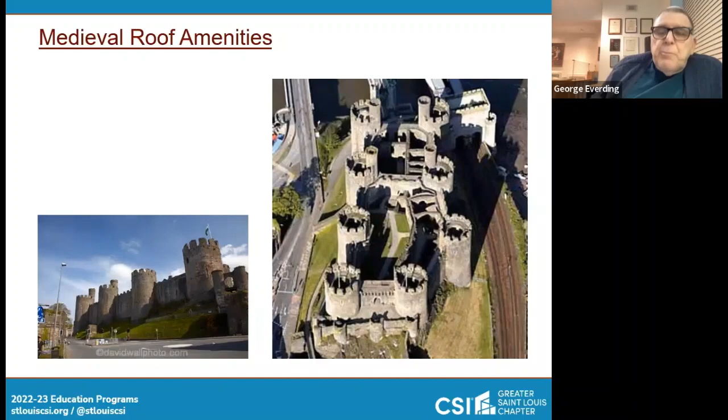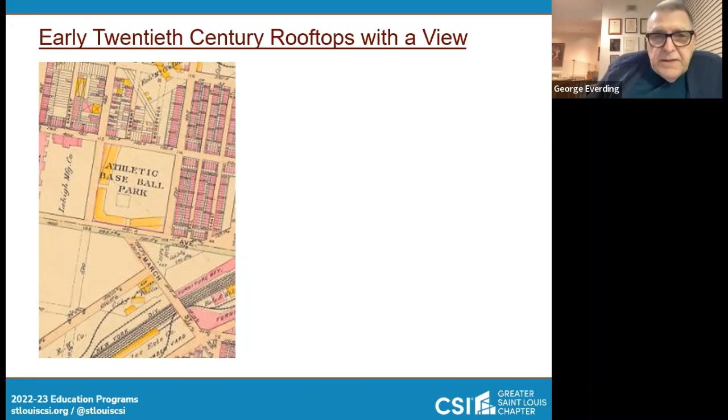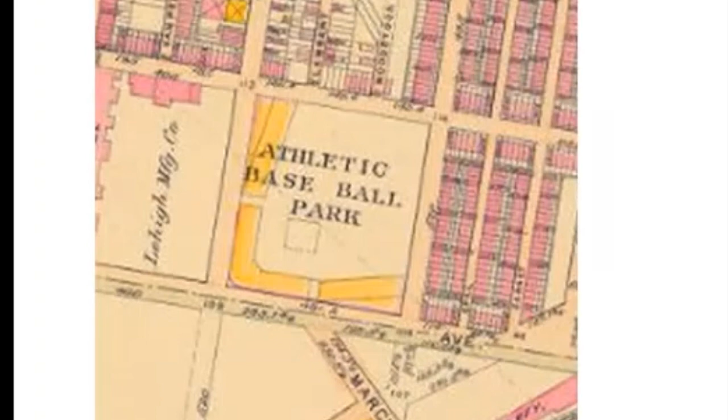And we're going to look at another instance of a view in the 20th century. This is a map of the Philadelphia A's ballpark in about 1910. In the earliest part of the 20th century, they were a powerhouse, and they built a new ballpark. You can see, kind of to the right-hand side of the ballpark, there is a row of row houses, and that fence out in right field is only a 12-foot fence.

Things can change. And this is possibly the world's largest green roof—this is Millennium Park up in Chicago. They claim it to be one of the largest extensive green roofs in the world.

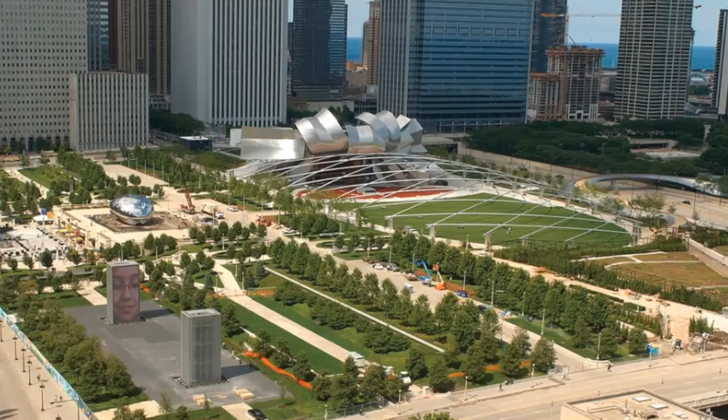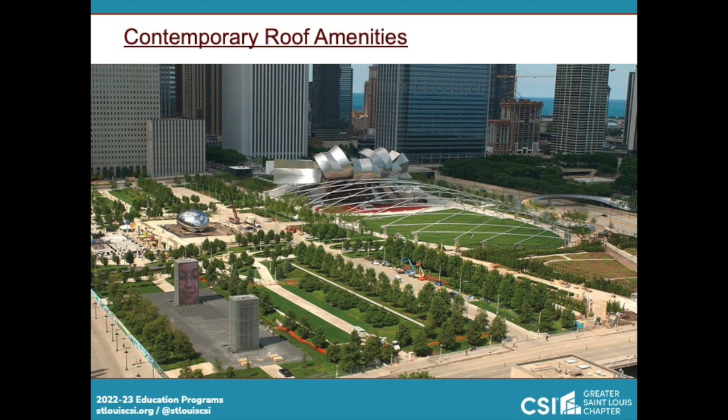If you're planning your green roof, this might be the model you want to put on top of your 2-family flat. Pritzker Pavilion seats 4,000 and has 7,000 for lawn seating. There are various sculptures, fountains, play areas, and a skating rink, 11 separate venues total, and you can see it's quite extensively landscaped.

But I think the thing this has in common with the roofs we're going to be talking about today, other than maybe scale, is that it's accessible, it's useful, and it's a delightful place to spend some time. So I'll turn it back to Steve or Joe.

So for myself personally, I've been in this industry for probably about 20 years out of college, and I used to do healthcare design. Actually, I used to work with George years ago over at Canton Design. But probably for the last 8 or 9 years, I've really switched over and focused more on adaptive reuse. With that being said, my co-presenter here, Sarah, I'll let you take over.

Thanks, Joe. Hi, my name is Sarah Johnson Clark. I've been in the field for about 4 years now. Joe and Alan decided to take me under their wing from day one, and I've really taken an interest in adaptive reuse. So I've done a good handful of store renovations with Joe and Alan, and plan to do more. We look forward to presenting about roof amenities today.

So you want a roof deck, green roof, or roof amenity. That's really what we're talking about, especially with regards to existing buildings and our local standard of care.

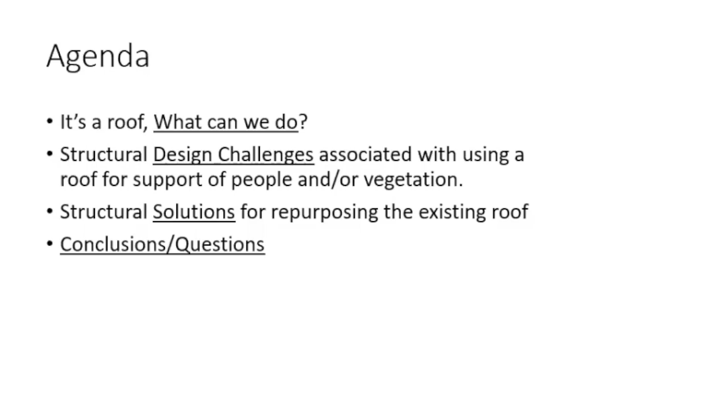What can we do with an existing roof? So first we're going to talk about exactly that, what can we do in terms of occupancy, but then also in terms of structural solutions for the roof amenity itself. So starting with the types of occupancy, the example you see here in these photos is the 900

North Tucker building in North downtown St. Louis. This is considered a roof amenity that has 2 parts to it. As you can see, we have an enclosure, and we also have a lot of outdoor space. This is actually a place of business and or event space for the building occupant, not necessarily a public event space, which for us structurally is a very crucial number that we need to understand going forward.

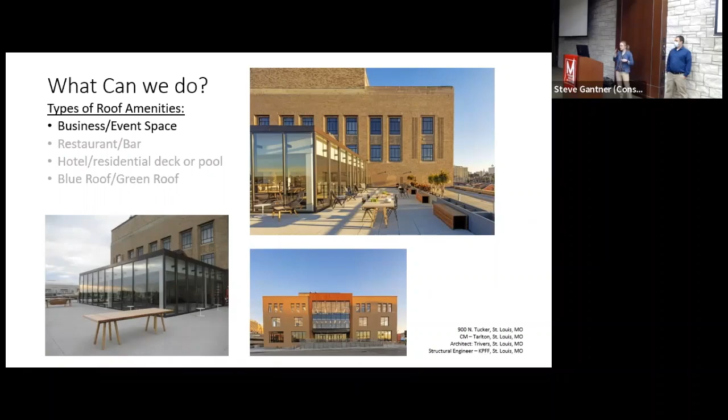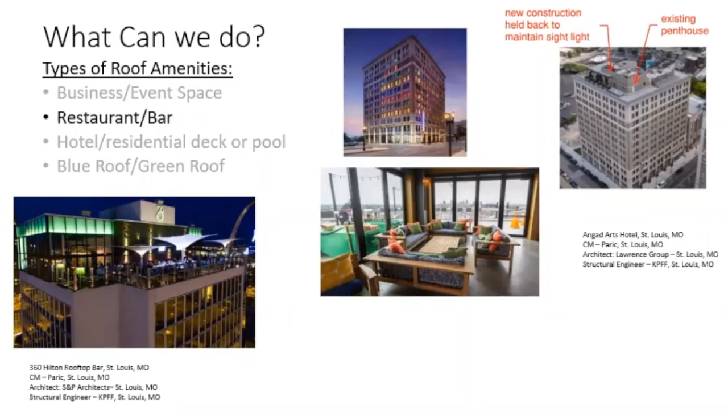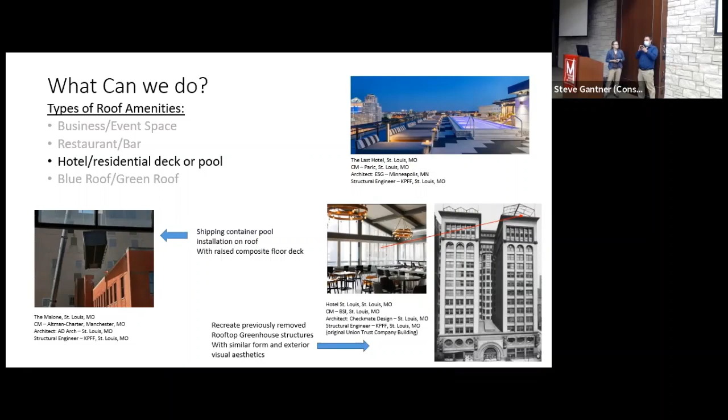Right, and for those unaware, SHPO is the State Historic Preservation Office. You go in for national tax credits and even state level tax credits. You go through SHPO, your Part 1 and Part 2 application first, and then it eventually works its way over to the National Park Service. Traditionally, Missouri SHPO is a little bit more cautious than the National Park Service. So if it passes SHPO locally, you usually pass through the National Park Service.

So in the lower left corner, this one is over in the downtown West area. It's an existing telephone exchange building in which the building itself had plenty of extra capacity. So we actually reanalyzed the building, did a little bit of supplemental support, and actually brought it into shape for the pool.

These pools, prepackaged, come around $40,000, and it's significantly less in cost versus having a custom pool added to a roof. So it's a good option as well.

In the upper right corner, this is the last hotel project. We ended up designing a steel pool system to be brought up in two parts by lift and then welded in place. We had an entire new frame structure for it, with occupancy and existing building.

In the lower right corner, you'll notice something really interesting. This is Hotel St. Louis, not to be confused with the last hotel. It was originally built in the late 1890s and actually had greenhouses on top of the roof, as you see in the lower right corner.

Since that time, those greenhouses were removed, probably before the 1920s, and everyone forgot about them. When it came around to repurposing this building, the discovery that greenhouses had once been there allowed for a new replica greenhouse system, even though it's an enclosed structure used for different purposes, to be built on top of the existing roof. At that point, SHPO would allow for this alteration with guidelines accounted for, because it had been there at the time of original construction.

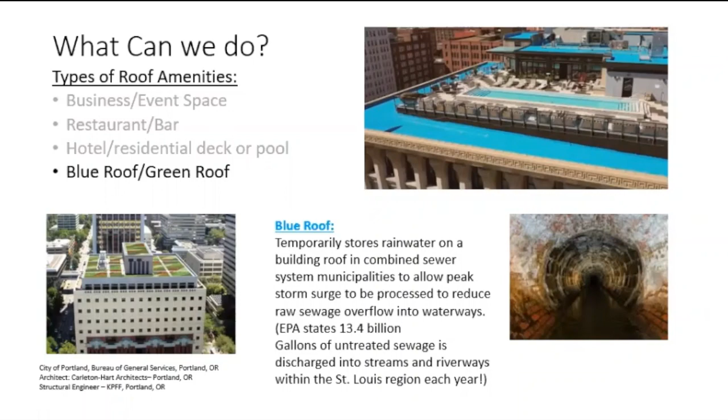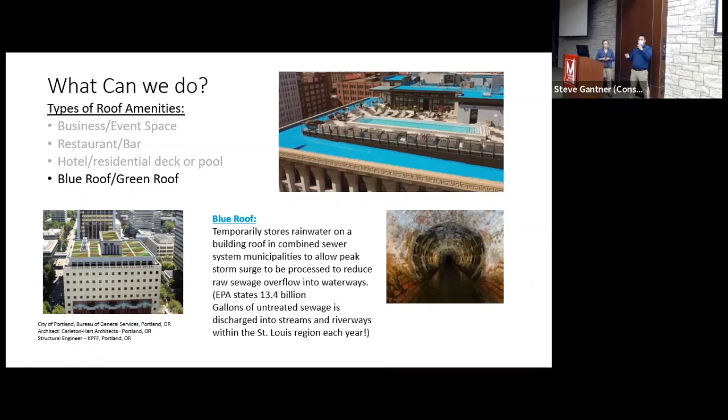An interesting fact: the EPA states that 13.4 billion gallons of untreated sewage is discharged into the St. Louis riverways each year because of the combined sewer system. That's why there's such a focus on this being an option for rooftop use in urban environments.

So now we know some things we can do with the roofs. We'll talk about what we can do with amenity structural systems. Sometimes we run into cases where, let's say, you have a heavy timber building, or something where the structure itself was lightly designed in the first place - there's not a lot of extra capacity.

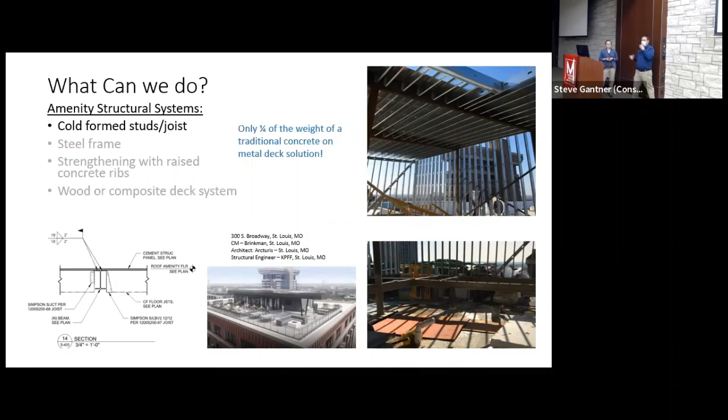This is an example of 300 South Broadway, which is now repurposed or re-identified as Ballpark House, I think that's what it's branded right now. It's right across from the stadium. What we ended up doing is putting a rooftop amenity deck on top of the building, and what was really important was that we weren't overloading the original structural capacity below.

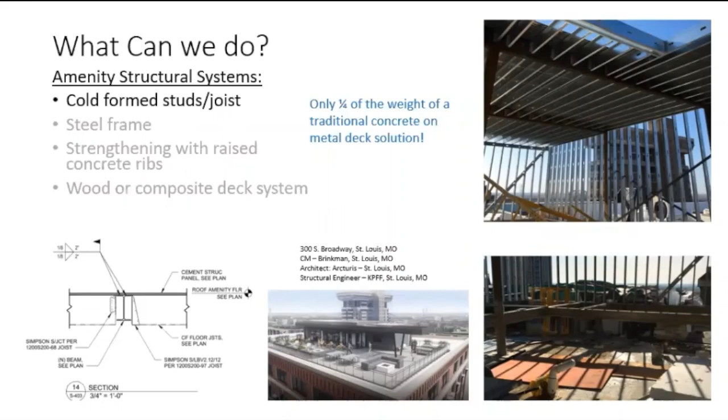So to try to get the weight down for the rooftop amenity, we ended up going with a cold-formed construction at the top, which reduced the weight to only a quarter of what it would have been with a traditional steel and concrete system. This allowed for strengthening the columns along the building and other aspects, really reducing costs and saving the owner quite a bit of money in the long run.

Another structural system that is often used is simply steel framing, whether using wide flange steel or, in this particular case, HSS tubes for our beams and columns. This particular system is beneficial, especially if you want glazing.

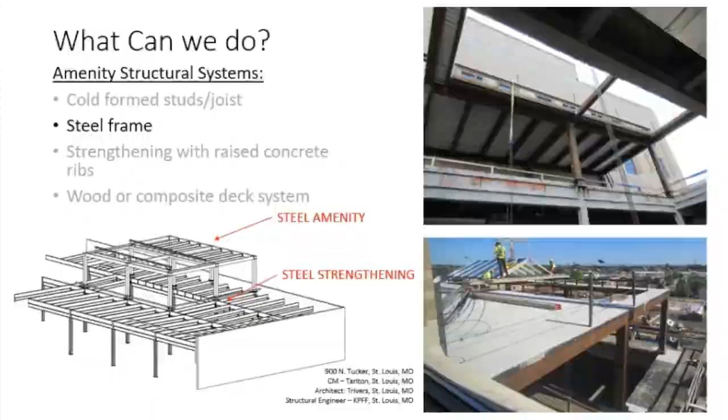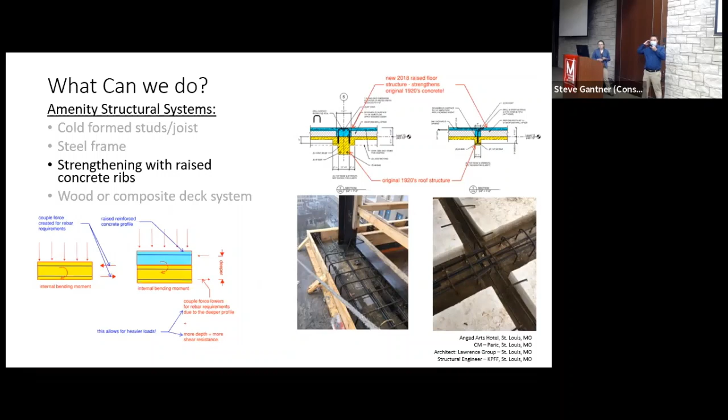So if we're going to go ahead and raise the floor anyways, why not use that raised floor in combination with the existing concrete structure below to strengthen it all? In this particular example, we use geofoam infill aligned between original concrete beams below, then pour the floor deck on top, shown in light blue. This allowed the new floor system to be monolithic with the concrete beam below, basically doubling the beam depth. This gave us the architectural elevation needed and also strengthened the floor system below without having to do any work on the underside. It's sort of a win-win scenario.

So if you've got a concrete building and you want to do a rooftop strengthening measure, and you have to raise your floor system up, consider talking to your engineer of record about this particular idea.

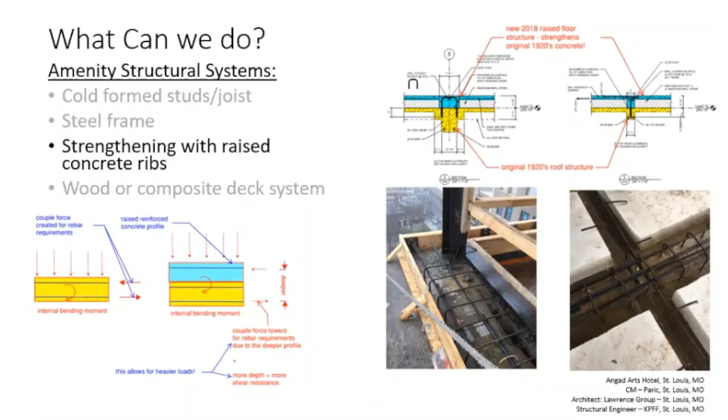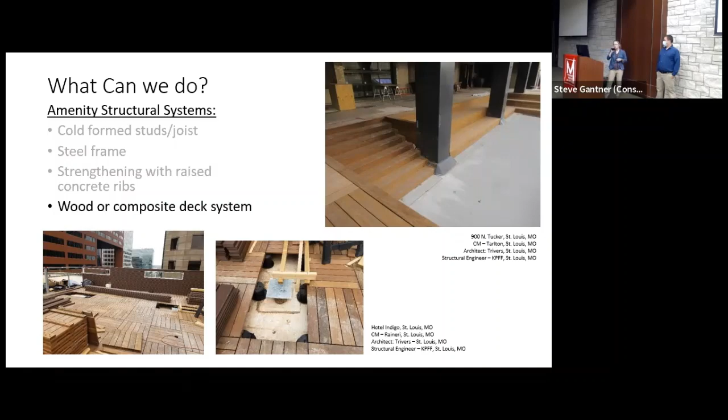The last material we're going to talk about, which many of us are familiar with, is using wood or composite deck systems. This is particularly beneficial whenever you do not have an enclosure, or you have an open air system, or an amenity space that may have an open structure such as a canopy or pergola. One thing we can do, shown in the middle photo, is prepare your existing building to have a pergola, even if budget does not allow a pergola immediately. We can plan for the future, like shown in that building.

Now that we've talked about what we can do with new roof amenities, we're going to switch topics and talk about design challenges. First, we're going to talk about clues that the existing building may tell us whether it was actually designed to have a vertical expansion or not.

One very obvious existing building clue is if you go on your roof and see a bunch of protrusions in a nice even grid, typically aligned with the columns below. That's because they likely are columns - stub columns. This automatically tells us that your existing building was meant to have at least one more story in terms of vertical expansion, or even more, depending on the actual size of these stub columns.

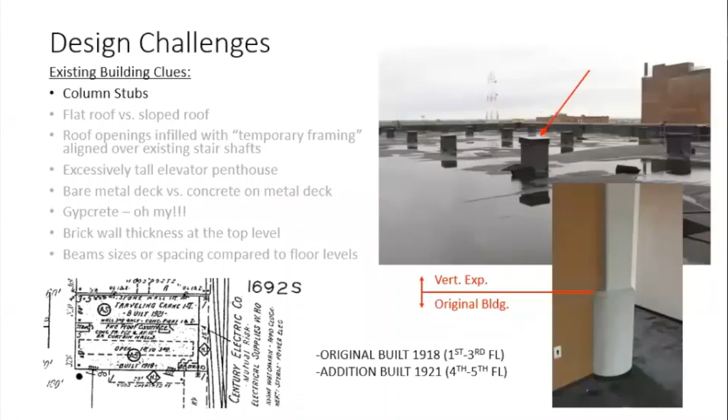Another example is on the site - this is actually a photo of an actual expansion. The original building was built in 1918, and it was a heavy reinforcement building, but then we noticed that for some reason it changed from concrete to steel. We found literature and photographs telling us that they actually had another two-story vertical expansion using structural steel. This is a building that both Joe and I were involved with.

Another potential building clue depends on what is actually creating your roof slope for drainage. Is it the actual roof structure creating the slope, like the sketch in the bottom right? This tells us that's probably meant to be a roof, and it's going to be pretty difficult to change that roof structure to be flat. But if you go on a roof and it's an incredibly low slope or a flat roof, this tells us there's the potential that this roof could be designed as a floor.

Another way to tell whether you have a flat or sloped roof is if you go up there and see a bunch of ponding in the insulation. In that middle photo, hard to see in the small photo, but there were several areas of ponding, telling us that obviously the drainage isn't working, or you do not have a steep sloped building - so there's a pretty good chance that this building could be able to expand vertically.

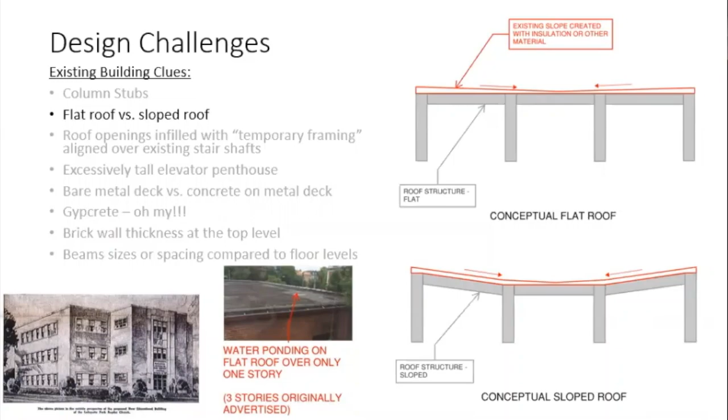This particular building is over Lafayette Square, right at the corners of the park, and it used to be a religious school system. It's now basically a charter school system. But at the time of original construction, there's an advertisement from that religious organization identifying that it was going to be a 3-story building. We found on site that it was actually only built as a 1-story. So this gives us a clue, hey, we better take a look and see if there's any other clues in the building if it's able to take vertical expansion easily.

So when we looked at the stair towers, we found that everything in the building is non-combustible construction, all concrete. You've got the stair tower, and at the top of it, the roof, it's all just hastily built wood construction. You would not put wood into construction if they meant for that to be the permanent solution. So that in itself gave us the clue that this was also built for growth expansion.

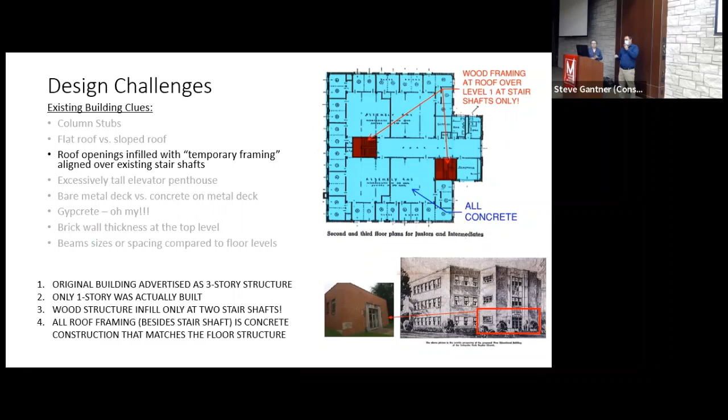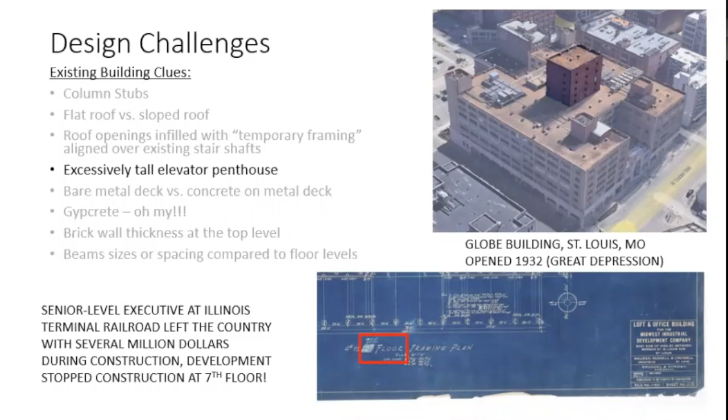Another potential indicator: if you go up on your roof deck and it feels pretty solid, or on the underside you see a bare metal deck, and it still feels pretty solid, there's a pretty good chance that you may have a concrete on metal deck system, whether it's composite or not, that would be to be determined. But regardless, concrete on metal deck systems are significantly stronger than just a bare metal deck or a tin roof deck. This tells us there's a pretty good likelihood that at least the deck itself would be able to withstand the additional load, not necessarily the framing, but the deck, which is definitely important in our case.

So if you go into 1940s to 1960s schools, anywhere around town, anywhere on the East Coast, doesn't matter, take out the ceiling and look up. What's that fiberboard? What's going on with that? Acoustical? No, it's more likely the bridging and furring system. Basically you've got little bulb tees, kind of like railroad tracks, running between the steel bar joists, and then you've got the fiberboard. If you tear that fiberboard off, you find it's like drywall without the actual paper. Common practice at the time to keep costs down was to go up there, lay out welded wire mesh, and pour basically drywall on top of the roof to make that consistent.

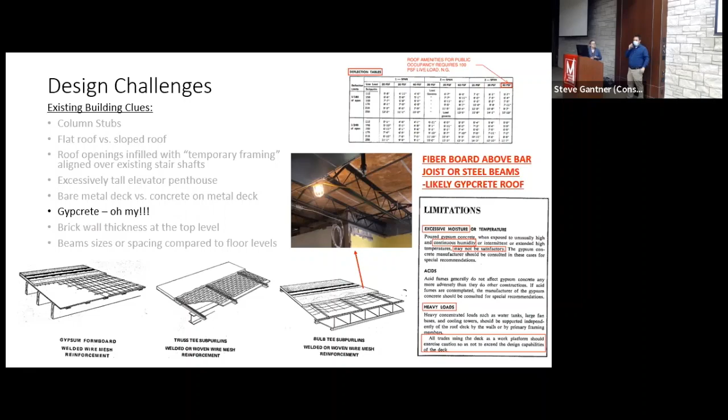Couple of problems with that. One, manufacturers simply say avoid excessive moisture, avoid excessive humidity. Well, we all know how it runs here in the summertime, so that's already knocked off. Another thing is avoid heavy loads. So all trades using the deck as a work platform should exercise caution not to exceed the capacity of the deck. So if we're going to try to put rooftop units in, any kind of heavy loads, we're violating this. And you'll notice in the corner, the maximum loading these systems can handle is 40 pounds per square foot. If you look at building code for public occupancy on roof units, that's 100 pounds per square foot, 2.5 times what this was ever designed for.

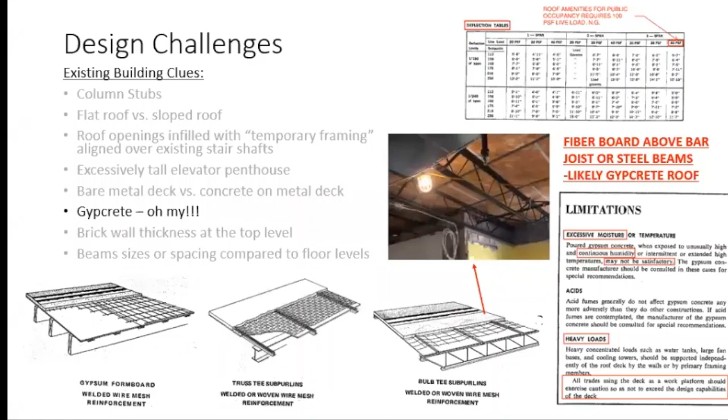So at the end of the day, when you see this, try to avoid using these roof systems at the outside of the roof.

Another potential clue, particularly for mass masonry construction which is very common around here, is to go up to whatever your tallest level is, or access the roof, and measure the parapet to see how thick it is. There are several historic references, in this case the Kidder-Nolan 7th edition from 1921, but even the St. Louis building codes at this time had similar tables. This literature has tables that tell you exactly how big your wall needs to be based on how tall your building is supposed to be. So if you go up there and it's supposed to only be 13 inches thick, but it happens to be 18 inches thick, you automatically know this building was probably meant to keep going upwards with vertical expansion.

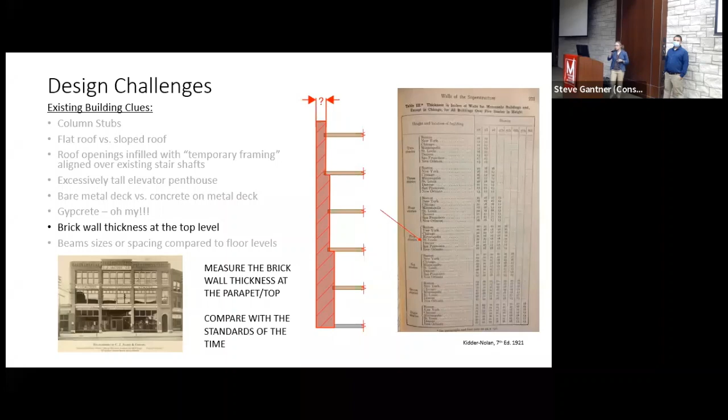Some more clues when you're walking with the building owner: beam size and beam spacing, real simple. If you go to a typical floor, you look up and measure one beam. For example, over here on the complex, the beam size is 16 by 22 on the floor. Then you go directly up underneath the roof around the perimeter, and you'll notice that same beam spacing is actually a little bit shallower, more like 18 in this case. So what that told us is that the flat roof system, even though it's pretty flat, was actually never designed for public occupancy on the floor, just from that comparison. Real simple, you won't do it.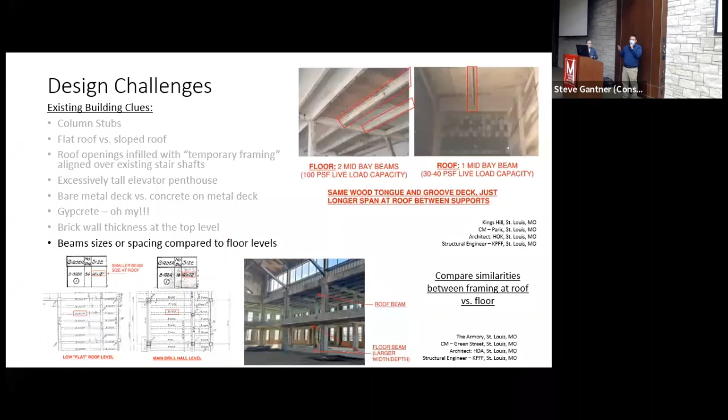Another example is the old warehouse right across from our offices, which we're working on redeveloping. It's heavy timber construction, and the floor and roof system both use the same 2.5-inch thick tongue and groove decking that was pretty common for warehouses. You might think, okay, they're the same capacity. They're not. You'll notice that on the floor we have 2 beams per bay, but on the roof, with the same exact decking, we only have 1 beam in the middle per bay. That simple observation told us right away that this roof was not designed for additional loads. It's one reason to spend money to strengthen it.

So to continue on design challenges, we're going to break it up into 2 categories in terms of structural needs. The first category is gravity challenges. When we say gravity, we mean static or vertical loads, like people, tables, chairs, anything that's not moving a whole lot in terms of direction. Then we're going to talk about lateral challenges, which means more dynamic loading - wind and earthquakes.

Starting with gravity challenges, one particular challenge is columns. As Joe mentioned previously, let's say you have an existing building with heavy timber columns. Unfortunately, most of these heavy timber columns were pretty liberally designed and likely do not have any additional capacity. Another potential issue is that roofs leak over time - whatever precautions you take, eventually it will happen. What happens when heavy timber columns are exposed to moisture over time? We all know they rot. So there's a pretty good likelihood we'd have to help these columns out, even without adding a roof amenity, just to bring them up to code due to potential deterioration.

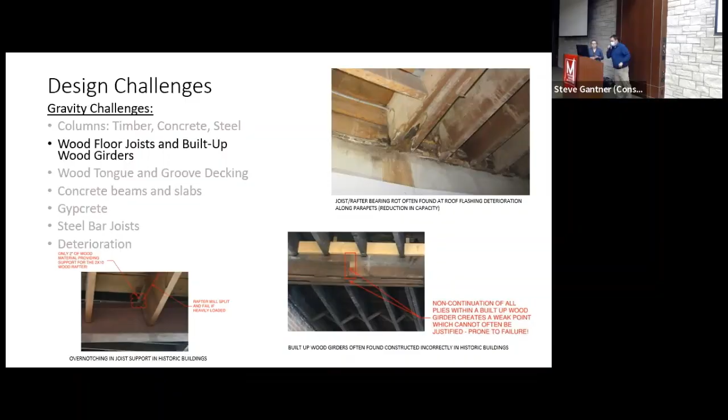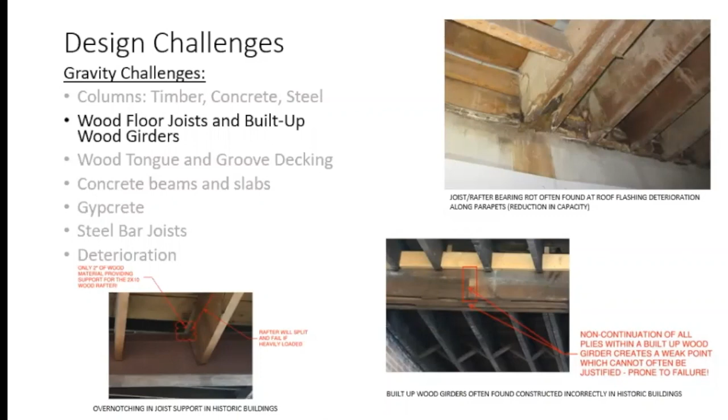All right, so wood tongue and groove decking - as mentioned, these old warehouses, a few things to look out for: one, we talked about earlier, the new spacing for wood. Another thing would be when you have a change of occupancy through the International Existing Building Code, you might have a different hazard level. So if the hazard level changes, run it through code consultants or whatever your process would be, and make sure you don't have a fire rating issue.

Additionally, as mentioned earlier on moisture, look for deterioration. A lot of times the deterioration of these decks, you're not going to see it from the bottom side - this is really bad. You have to actually remove the roof membrane where your condensation is getting trapped. So the top side of the roof is usually where you're going to see more deterioration, and it's very difficult to find out unless they remove the roof. So always call out a contingency for this.

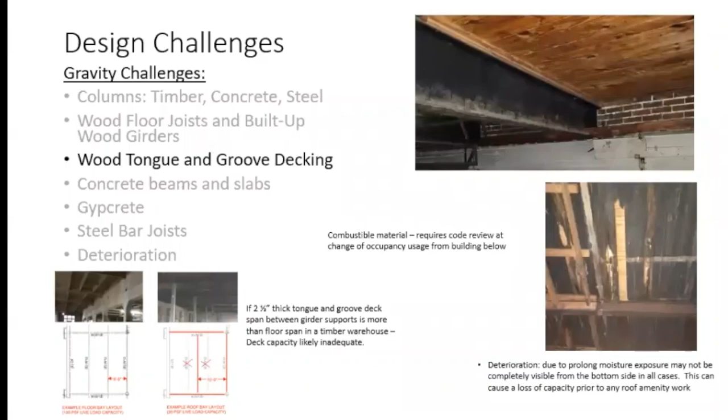Okay, so switching materials to concrete beams and slabs. Again, most of us, whenever we see concrete, think it's big, think it's heavy, think it's probably going to be perfectly fine - in many cases it is. But the reinforcement inside might be telling us a different story. For example, if you look at the sketches on the bottom, you have the one on the left and the one on the right - they look a little different based on where the reinforcement is located.

The one on the right is the traditional, proper way to lay out the reinforcement. But there are times where the little seats that the reinforcement is sitting on decide to fall over, and our top reinforcement becomes our bottom reinforcement, with nothing on top. That means the capacity that floor was designed for is no longer valid, so a structural engineer has to go in and calculate what the actual capacity is based on how it was constructed.

Another example of a gravity challenge is the type of construction. If you look at the photo on the top right, you'll see a lot of lines - this is called a four-way flat slab. We have reinforcement in all four directions: the two orthogonal directions and the two diagonal directions. That's a lot of reinforcement, so it got really claustrophobic and wasn't very easy to construct, leading to potential issues because of how condensed the reinforcement is.

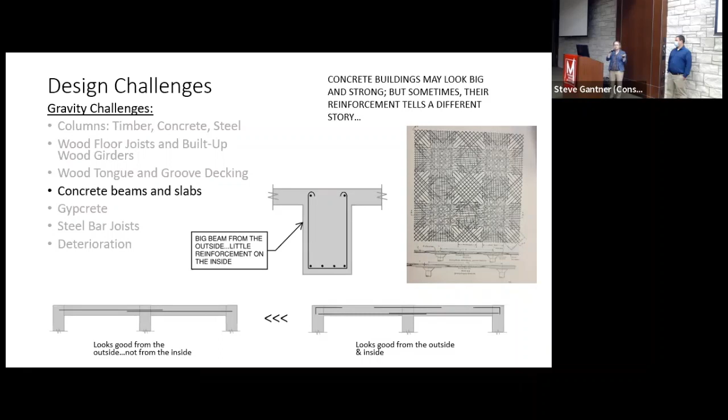Let's start with my favorite topic - Gypcrete. I want to say avoid this. As Jeffrey Bruce mentioned earlier, we're at 40 PSF maximum live load capacity, and we can run up against that - meaning your joists, your columns, everything's under-designed to start putting something up there. Additionally, if you were to take one of these tables and lay out a large piece of drywall, would you want one of these legs pushing down on the drywall on the job site? Probably not - you'd expect that to start indenting and punching through.

Similar concept applies to Jeffrey Bruce as well, trying to do basically paver systems. So if you have to do this, and the owner of the building is really dead set on having roof amenity, just go ahead and post up a line over each of the original columns, do an elevated frame, and strengthen the column. That's going to be the quickest way to try to reduce the cost.

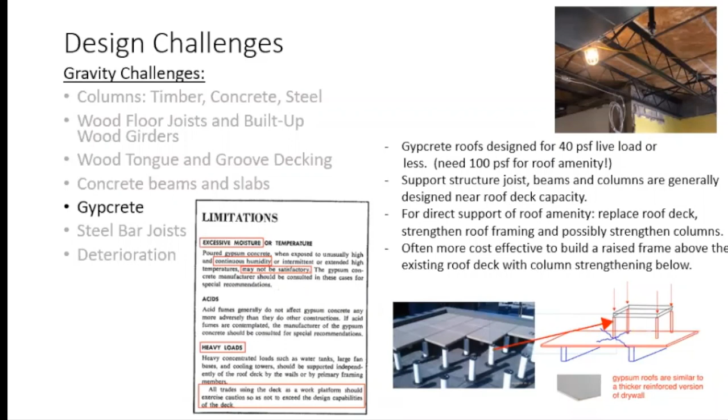It's steel bar joists - very common construction, even under current day standards, albeit with current COVID material acquisition issues, so it depends. Still, it's a very good product, very cost effective. Whenever you find an existing roof, you've got your metal deck and these steel bar joists, especially in our area, likely rated around 20 to 25 pounds per square foot, maybe a bit more. So if you see this type of system with the metal deck on top, know that you're going to have to strengthen the bar joists and the actual columns.

Now, since we're in an area where we pay fair wages for union labor, that means we're going to pay more for field labor. So in our market, instead of strengthening the steel bar joists as shown in that lower right corner, it's usually more cost effective to supplement the steel bar joists with additional steel beams. Just remember that when you're going to supply or scope your engineering.

Now, if you're in an area with low field labor rates, right-to-work areas, it might be worthwhile having a conversation about strengthening the bar joists, as shown in that lower right corner. That means adding steel angles at each original angle and welding them to the top and bottom of the joists. Once again, it depends on the market.

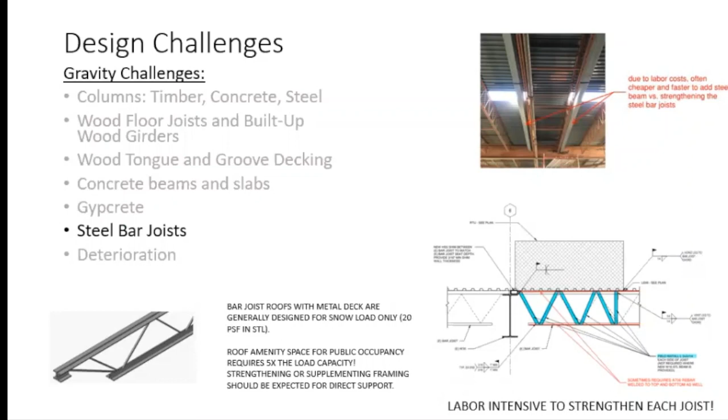As you can probably imagine, this steel beam was not very well protected at all, and you can definitely see what happened. It was exposed to weather for a significant amount of time, which allowed water to pond up on the top and bottom flanges, and it deteriorated to the point where I could actually stick my hand through the web.

Whenever we think of reinforced concrete beams, we think big, heavy, strong, and many times it is. But if you go into a basement or look at the underside of your roof where there's been significant water infiltration over time, there's a good chance you'll see concrete missing - the concrete cover on the bottom of your beam.

This typically happens whenever your beam is exposed to moisture, and the water finds its way into the beam through microcracks until it reaches the steel reinforcement inside. Once it finds the steel, that steel starts to deteriorate and rust. Those rust cracks expand, but have nowhere to go until the concrete pops off. This is typically how it looks.

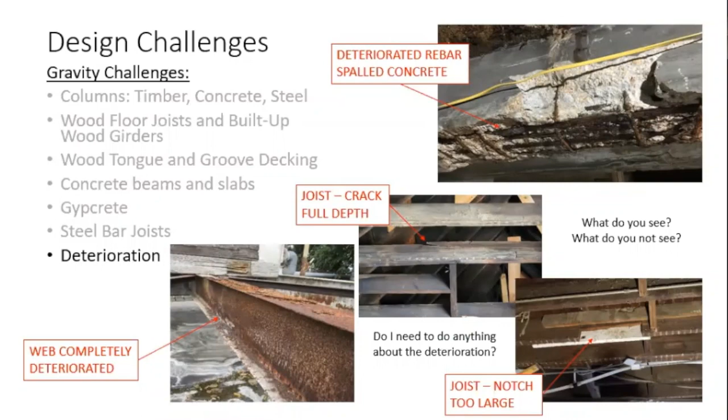Another potential issue with renovations: with wood, you're going to have plumbing running between your joists or underneath them, or they're going to notch your joists. There's a pretty good chance they'll notch where they're not supposed to, or make the notch too big, to where you actually need to help the joist out. The example in the bottom right photo shows a notch that's too big and in the wrong spot, so this joist would likely need to be sistered or supplemented.

We're just going to go briefly into this side topic, so we all have a better understanding of how it works and what it's focused on.

In general, if you boil it down for engineers, there are other factors in play, but the main key is Newton's second law: horizontal force inside the event is simply your acceleration times your mass. That's the main key we work with, though other factors apply too.

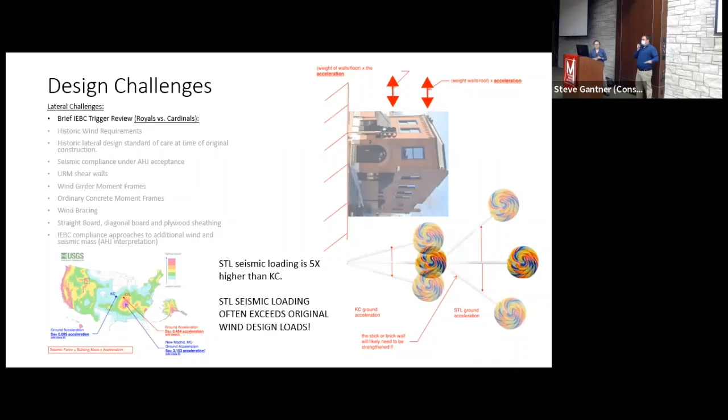So we're in a very weird state. That being said, we have different design effects in different parts of the state as a result of this, because we never see those consistently. So we have to really start looking from an international building code standpoint - what did they actually design to, and how does seismic come into play?

So it's a little lollipop, showing Kansas City shaking just a little bit, St. Louis shaking quite a bit more. So we have different standards of care for each part of the state.

To build upon that, if we do a quick comparison, older building codes say just take 20 pounds per square foot of wind load, and that's what you're designing to build to. That's what we see on the right side of the green space there, and that's pretty consistent in the Midwest at that time period. For this particular building, that would create a total wind pressure on the side of the building of about 25,000 pounds of force.

Now we take a look at Kansas City, probably a very low side seismically. So we take the size of acceleration in Kansas City, multiply by the building weight, and the seismic load comes out to about 14,000 pounds, so less than wind. So you can add a little bit of additional mass to the rooftop in Kansas City, and you're still going to have less total load on the building than what is already designed for wind. So not a big deal in that market.

If we take that same exact building and shake it up to what we're supposed to locally, we're at 69,700 pounds seismic compared to 25,000. That means if we look at seismic loading on that building in today's market, under a seismic event, that building sees 2.5 times the amount of load that it was ever designed for with wind.

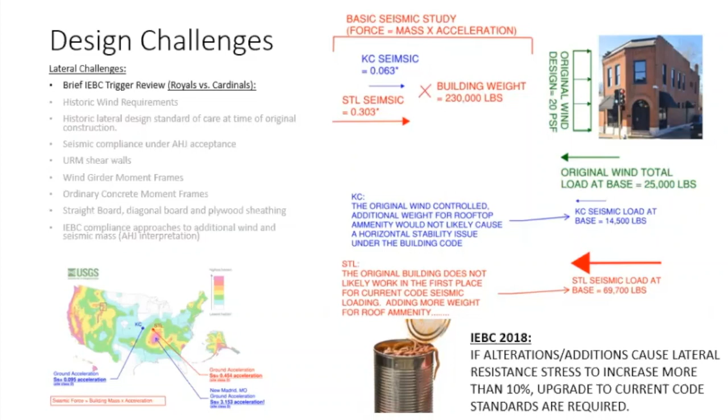So we know we've got a little issue. We'll deal with it later on the side of the topic for our market, but as you can see, it's not a big deal with engineers.

So basically, the current day code, for the same building, you're redesigning to 16 pounds per square foot of wind versus 30 back in 1917. So for wind design, we've actually liberalized quite a bit from what the codes used to be. We're going the opposite direction.

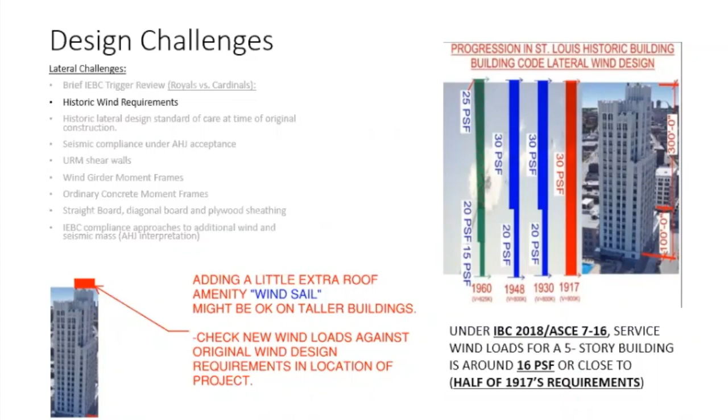So if you're actually going to handle wind for an old building in our market, chances are we're far over-designing that old building in the first place compared to what's needed. So it's not a big deal. Really, for us, it's more of a focus on adding extra weight to buildings, because that's the real issue.

Another lateral challenge is understanding the standard of care at the time your building was constructed. As mentioned, not all buildings actually have a lateral force resisting system. There's a pretty good chance that it's not there. But at least for taller buildings, there is a chance that there is something. So it's always good to understand the standard of care at the time, and many times the standard of care depends on the height of the building, as well as the proportions of your building, your width and your depth, and how that relates to the height.

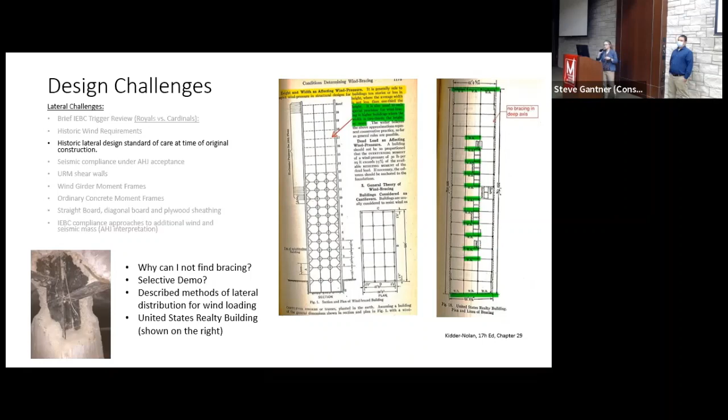So we're going to get into the gray area of the code. The International Existing Building Code says basically if you're going to change anything about the building, you need to analyze it. As we demonstrated earlier, if you start bringing seismic into play in our region, you'd just tear down the building because it's all going to fail. Well, the IEBC recognized that's not realistic.

We need to actually try to preserve and do a 'do no harm' approach. The IEBC built in this exception: as long as you're not increasing stress in the building's lateral system - the shear wall that keeps it stable - by more than 10% from the pre-alter state, you're grandfathered in, you're fine. That's the key.

Depending on the authority having jurisdiction you're working with, some will accept supplemental lateral resisting elements. That means if the authority having jurisdiction accepts this ruling, you have to talk about it, and St. Louis generally does accept it.

That means if you put in supplemental shear walls or other elements that help the building but don't really bring it up to full code, you're shedding some of that load off the lateral system to keep the original system. City of St. Louis generally accepts that interpretation. So just talk to the AHJ you're working with and make sure they're on the same page, that it's copacetic with the standard of care.

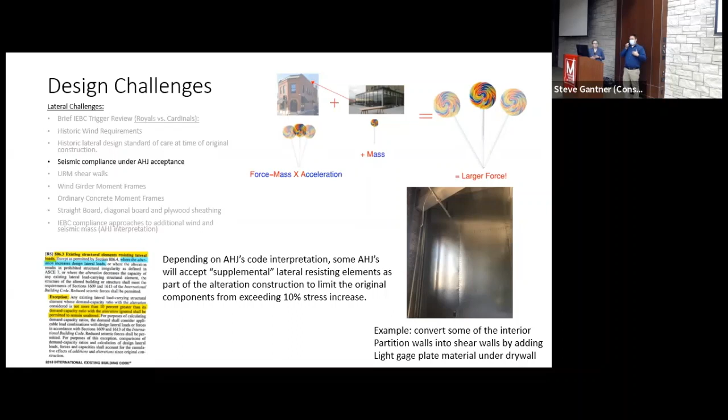So for local environments, instead of doing a full lateral upgrade for a 10-story building that's probably going to be around $3 to $5 million, a lot of times we'll look at converting some of your walls into a light-gauge shear wall by adding thin lightweight metal-to-metal shear walls just to keep the cost down. Due to financial constraints, especially in our environment, this is often accepted.

So you've probably heard people talk about the topic of ductility and non-ductile systems. When you're designing a building, you want it to be highly ductile. So what does that mean? Well, putting in reinforced masonry, for example - anything that's unreinforced is considered non-ductile.

That means when you're placing pressure, trying to shake that building back and forth, you're hardly losing it until it's overloaded. Then all of a sudden it snaps and collapses. It's like a saltine cracker - you start twisting and pulling, you push a little, and all of a sudden it breaks.

But then take something like taffy - you start pulling on it and nothing changes, it goes back to its shape. You pull it harder, and you bring the product into a ductile state. It stretches, and it still stands up enough to not snap. You have to have a scientific design for that.

So if you're going to use basically a moment frame, something to seal it, that's considered highly ductile. That's the goal for a lot of practicing structural engineers whenever they're trying to bring a building up to code or design a new system.

Another potential lateral challenge is the type of construction, particularly for steel frame buildings. Nowadays, whenever we have a new steel frame building, as Joe mentioned, there's this term 'moment frame.' Whenever we say moment frame, you can imagine a column and a beam coming together, and let's say we start trying to push it - well, that column and beam originally started with a 90-degree angle at that connection.

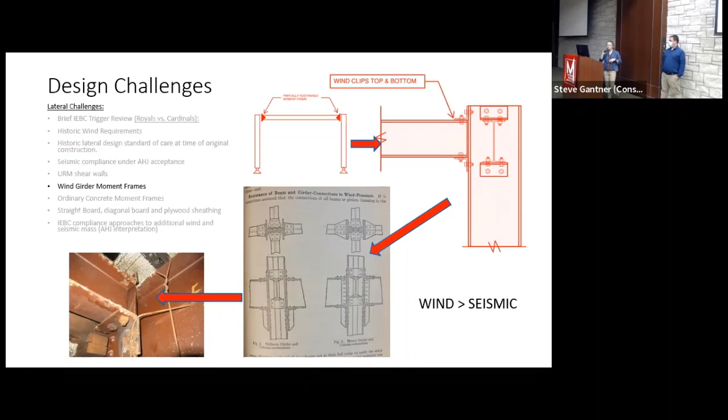But then, as you can imagine with an earthquake, that's the opposite - we're going to have your building moving in multiple directions. And in this particular case, these connections do not handle that well. So there's a likelihood that this connection is going to need some help if you have a seismic event.

Concrete moment frames. If you go into an old building, for example, and you were to slice that concrete beam down the middle, you'll notice the top reinforcing goes over the column and extends both directions pretty far, but the bottom reinforcing only goes into the column maybe about 6 inches, same on the other side.

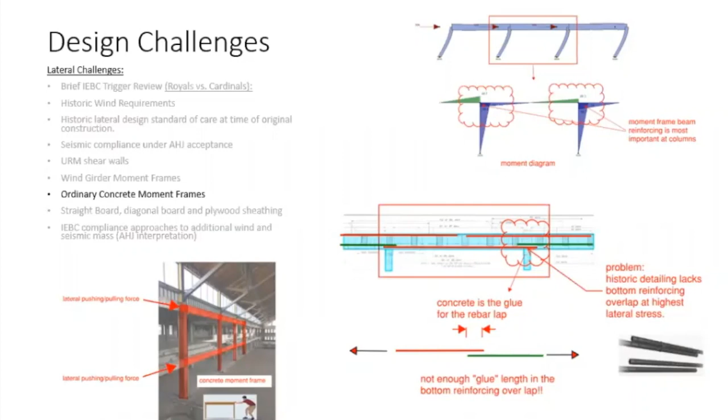Additionally, for long, skinny buildings, there was a big push from developers to knock out interior walls and make open floor plans. The problem is you have existing long walls running perpendicular to your long wall. So when you get rid of the interior walls and start shaking the building, the diaphragm has to span even further horizontally to reach your end walls. By blowing out those interior walls, you're making the building weaker and more likely to twist. So try to keep those interior walls.

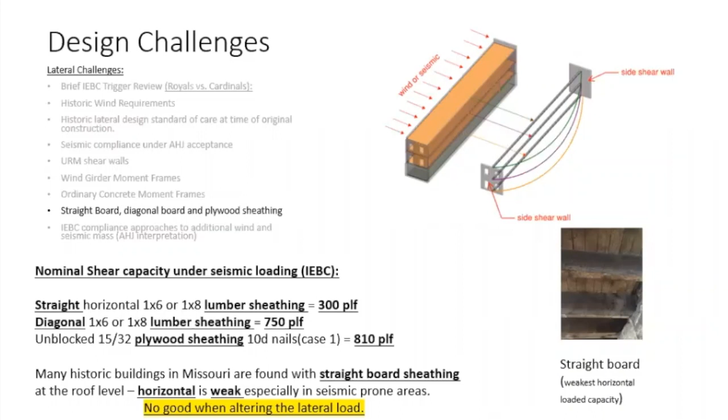Now, if you have to blow them out and you're doing floor system work anyway, instead of just leaving the wood floors as is, shoot plywood sheathing down over the top. That will strengthen that horizontal diaphragm ability quite a bit, giving you a better chance to keep the building standing and transfer the loads all the way back to the end wall.

This is a very brief example of the 10% rule that Joe was talking about earlier. Let's say we have a nice heavy masonry wall, very common in this region, about 50 feet long, solid with no openings—great for us. But due to potential alterations, let's say you need to put a couple of doors and windows here and there, and you end up taking out about 10 feet. Well, 10 feet of your 50 feet is 20% of your wall, which is over that 10% threshold.

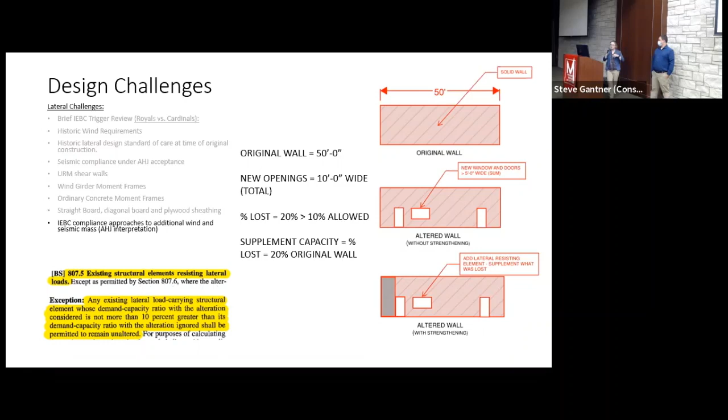So there are really two things we can do. As Joe mentioned, as a principal we likely need to supplement, either by designing the new wall—whatever it is, a concrete shear wall, a new masonry wall, a light gauge wall—to take that 20% that was lost, or by designing it so that what's left of your existing masonry building only exceeds the capacity ratio by 10%. Again, this is where you need to talk to your AHJ and see which way they would prefer.

Now we've finally wrapped up the challenges. Now we're going to talk about solutions, both in terms of gravity and lateral. I apologize, I'll try to run through this fairly quickly, so bear with us. For gravity solutions, we're going to talk about framing and strengthening—so the roof framing, your beams, your girders—and I'll talk about columns at this point too.

One very easy gravity solution is what we call steel scabs, which means making whatever your existing steel member is—let's say a wide flange beam of some sort—bigger. There are a few ways to do that: we can add a plate on the bottom, add a channel on the bottom, or in this case, this particular detail is from the 900 Tucker building we've talked about a couple of times.

The roof needed a lot of help, to where we actually ended up adding new wide flange beams to the underside, essentially doubling up what our beams and girders were. So this is just one fairly straightforward gravity solution.

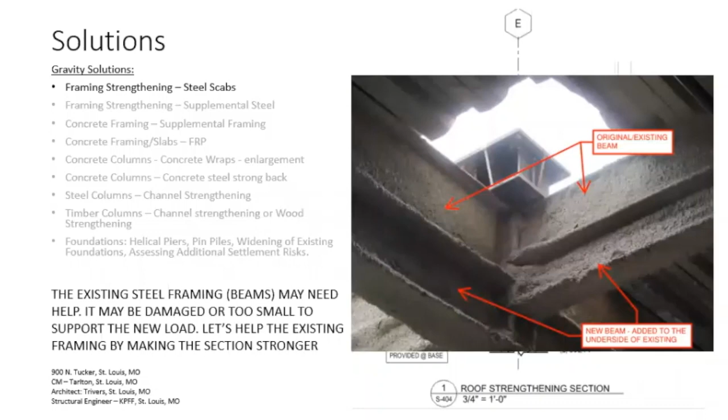And this is a photo. Sorry about all the fire protection, but you can kind of get the gist of it - we have our existing steel beams on top, and then you'll see the new sections on the underside, deepening those sections.

Another framing strengthening system is what we call supplemental steel. Typically whenever we add supplemental steel, as Joe has mentioned previously, we're really just trying to cut down the span of whatever your original existing roof is. We're either trying to cut your roof deck down, or in this particular case, we're actually trying to cut the span of your floor joist down.

For example, this is the 300 South Broadway project that Joe mentioned previously. The existing construction, we have our wood joists, and they ran about 20-ish feet, plus or minus. Instead of doubling up the joist, which wasn't really reasonable due to constructability issues, one thing we could do is add a new support line right down the middle. So now those joists are only going 10 feet, no longer 20 feet, which significantly increases our capacity in general.

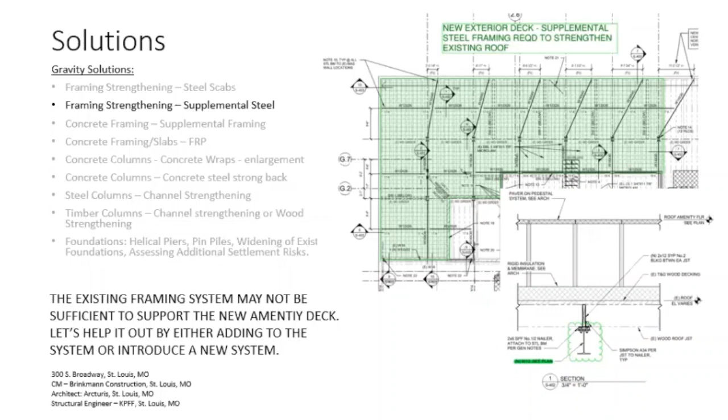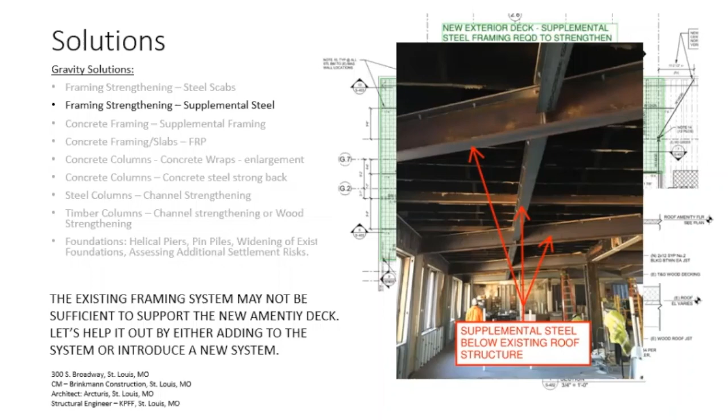And then concrete framing - again, whenever we say framing, we're just talking about our beams and our girders, not our columns just yet. But with concrete framing, we can also use a very similar approach to steel, and that is by adding supplemental steel framing. This is particularly good whenever the beam is either too damaged or it's going to be too expensive to repair your reinforced concrete beam, or in this particular case, the beam's in our way.

So for example, this is the 100 N. Broadway building right downtown. This is actually an access to the garage down below grade. We had the green beam that you see highlighted, that was our existing beam, and you can probably see that there is now a stair running straight through it. This was just due to reconfiguring the stair, and our concrete beam's in the way.

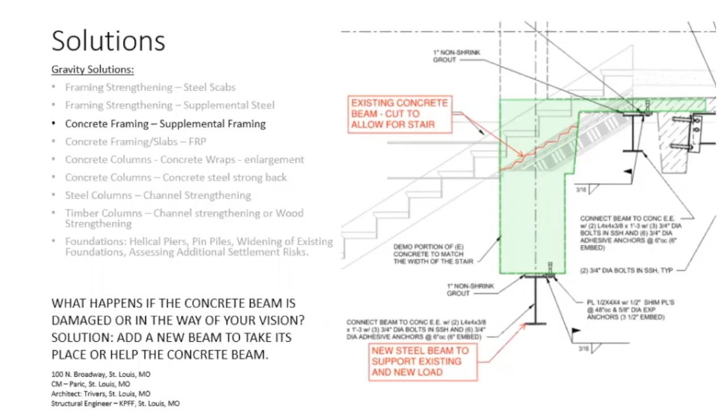So what do you do? We add a new steel beam on the underside, designed to support that existing concrete beam, and then everything that beam was holding - we call it a day. It's a fairly straightforward solution, and here's a photo of that.

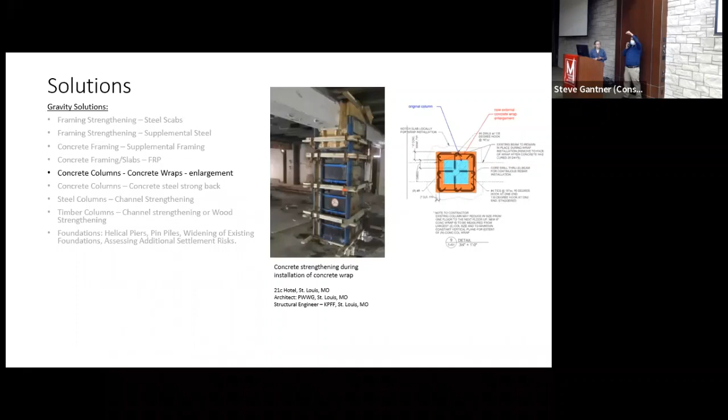Additionally, if you have a concrete column that's really undersized for building up on a building, another thing you can do is drill it and epoxy bars around the perimeter, then do a reinforced cage around it, and pump in high strength grout. That's an example from a 21c project in downtown St. Louis.

So sticking with our concrete columns, let's say you don't need as much help, so a concrete jacket wrap is probably not warranted. One thing you can do is basically make it a composite system using a steel strong back.

You can see that in the photo on the right - there is a new steel tube beam, which is actually anchored to an existing concrete column. In this case, it was added because the new roof amenity load we were adding on top was actually changing how it was applied to the column. It wasn't necessarily that the column was being significantly overloaded, it was just because we changed how we were applying the load, and our concrete column did not like that.

And then also, since in this particular case we're on the perimeter of the building, what happens if you needed to make that column bigger? You probably don't want to get rid of your infill masonry that you see on the right and left. So in this particular case, to help with constructability, that's another purpose of this steel strong back - you're just strengthening the side that is actually accessible at the time.

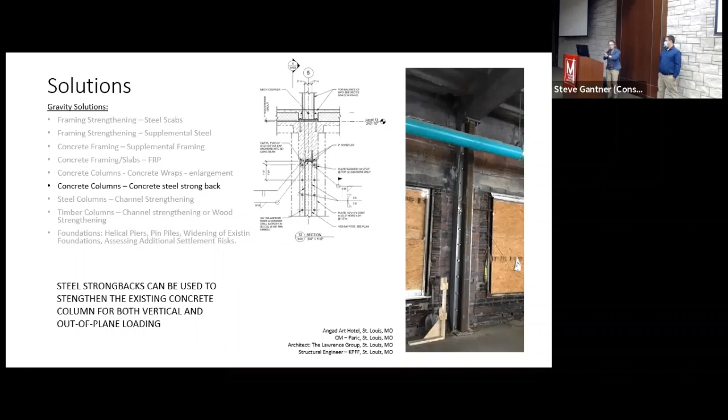Now switching to steel columns, one thing we can do is very similar to what we talked about previously with steel scabs, making the section bigger. We can do that with columns too. In this example, we had existing wide flange columns that needed help, so we added channels on either side, making the entire column section a lot bigger. We can do this with channels or plates, depending on what you need.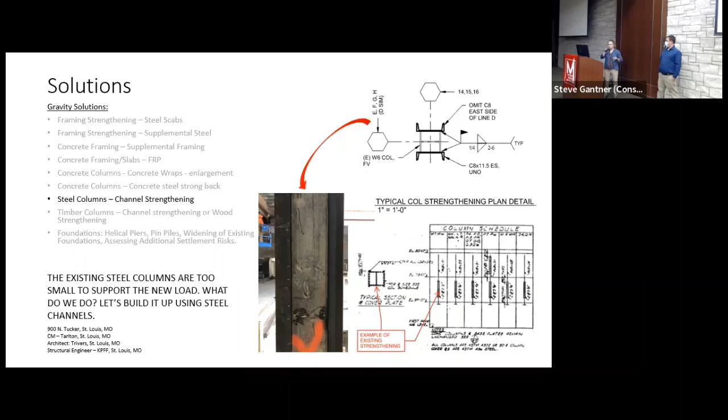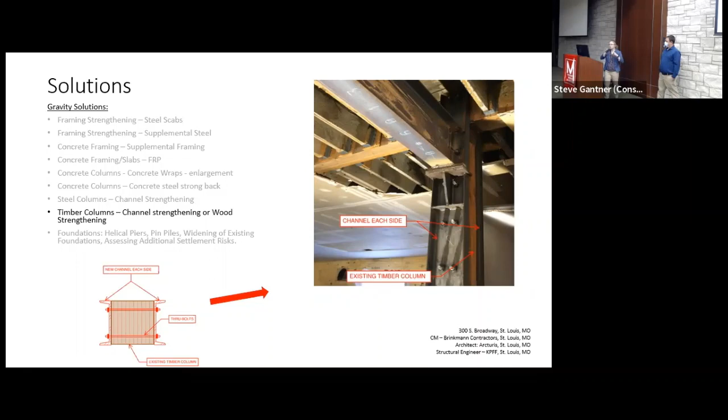Now switching to timber columns, as we mentioned previously, timber is often difficult to design and usually needs some help. There are a couple ways to do this. If it just needs a little help, you could add more plies and make the entire wood section bigger. Or you can make it a composite section with steel channels, sandwiching them on either side of the timber column to really help that column system out.

All right, foundations. A long time ago in our region and other parts of the country, the whole concept of safety factor didn't really exist for geotechnical design. The city of St. Louis, for example, stated that if you had a natural clay soil designed for 5,000 PSF capacity - what does that mean? If you look at the current IBC code, where they said 5,000 PSF, you're actually only supposed to be at about 1,500 PSF.

Honestly, if you get a geotechnical report, you're lucky to get much more than 2,000, even 3,000 sometimes. So what that means is, before we do anything to the building, if you were to actually analyze it without touching it under current codes, that thing should have sunk a long time ago. That's the reality of how it goes. So all of a sudden we're dumping extra load on the roof, adding roof amenity, and the building didn't work in the first place. What do we do about it?

Something you can talk about with your engineer of record or your own project is: should we consider contacting a geotechnical engineer to see if they would give us an estimated soil settlement analysis instead of a capacity recommendation? So you can find out, if I want to add so much extra load to the roof, how much more is the building going to settle? That's more important than knowing it doesn't work in the first place, right?

If you find that someone wants to settle maybe an extra inch from what's already settled, maybe the building owners will accept that risk - just as long as it's in writing and you get the indemnification clause stating that you're not at risk as the design team. If they're willing to accept that, you have to give it to the owner, not the builder. And sometimes people are willing, because you start looking at a million dollars worth of foundation enhancement and the project's over budget - that comes up quite often, frankly.

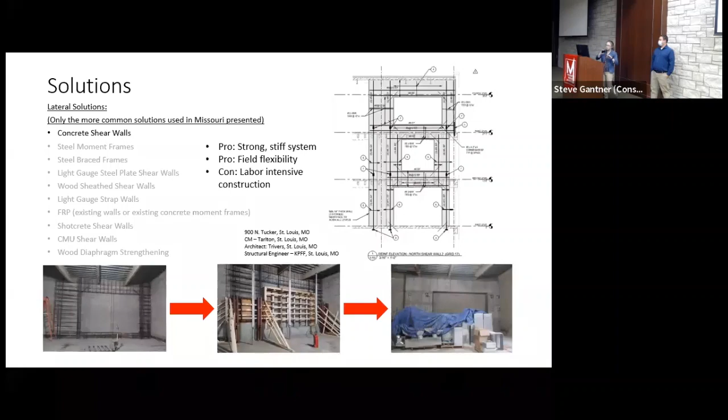Let's say you have masonry facade, or you have infill masonry, so you have a multi-wythe infill masonry at your building facade. To keep that brittle material from potentially cracking over time, you're going to probably add a stiffer concrete shear wall. Another particular pro is there is a pretty decent amount of field flexibility, because nothing is ever going to actually go as smoothly as you want on site.

Let's say you're putting in your reinforcement and you're starting to work the building more than planned. Well, there's a pretty good chance that you can just shimmy your reinforcement around and it will eventually work out. But the major con with this, due to all the field labor, all the reinforcement, all the formwork that is required, is it's going to be very costly in terms of labor, even though it is a very strong system.

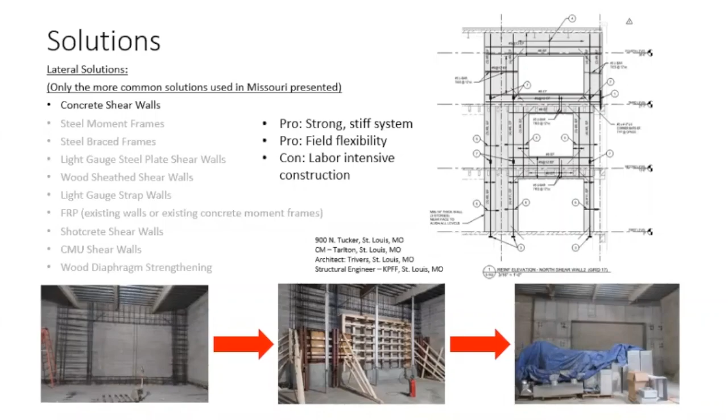So if you have an existing building that has a frame structure all the way around, depending on the era, you might start seeing that. If it's 1890s, forget about this. So if you have a frame structure where you don't have a load bearing reinforcement wall on the perimeter,

you might consider putting moment frames to supplement if you're putting roofing on the top. This allows for the open programming still. Architects love this, and basically it's fairly easy to install compared to some other systems.

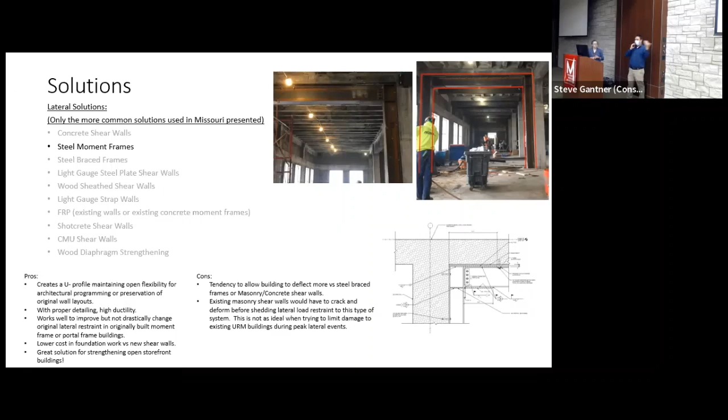So similarly with moment frames, another option is steel brace frames. Steel brace frames are typically stronger, they're stiffer when compared to moment frames, but they are still considered a very highly ductile system. That ductile topic that Joe talked about previously, which is very good for seismic loading.

Another pro is that they can be aesthetically pleasing, and then there is some flexibility with the actual braces themselves. We can accommodate windows, we can accommodate doors, typically, or the entire configuration can be updated from the example that you see here.

The major con is that it is pretty costly to install. As you can imagine, field flexibility is not as forgiving in this particular case, and a lot of field measurements are required, and also just flexibility when actually installing, because again, you can take all the measurements you want in the world, it's never going to go up exactly how you want it to.

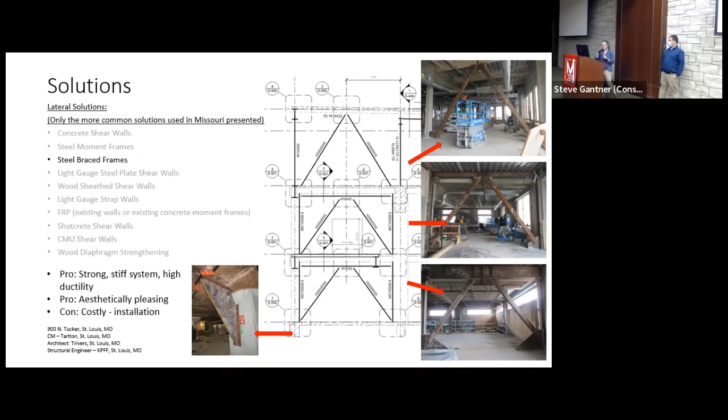So another example of a lateral solution, this one Joe did mention previously, is the light gauge steel plate shear walls. Mouthful. Essentially, what we will do is we'll take out as many partitions in the existing building as we need, and the ones that are remaining, or even the new partitions coming into play, we'll simply add a very thin steel sheet to it.

It actually will be so thin that you won't even notice that it's in your assembly, but it will be helping us out constantly. Another pro to this is that it is incredibly lightweight. The partitions are already there, or they're already going to be there. It's non-combustible, and it's also very cost effective. Again, partitions are there, and the steel sheet is fairly easy to install.

Another pro or con, if you look at it, is it's not a super stiff system whenever you compare it to the steel moment frame or the concrete shear wall that we talked about. So typically these are mostly beneficial whenever we're just over that 10% threshold that we were talking about previously. So that's the main con to them, is that they are not nearly as stiff as some other systems.

So this is an example of what that steel plate shear wall looks like while being installed. Again, it's fairly easy to install whenever you compare it to other light gauge systems.

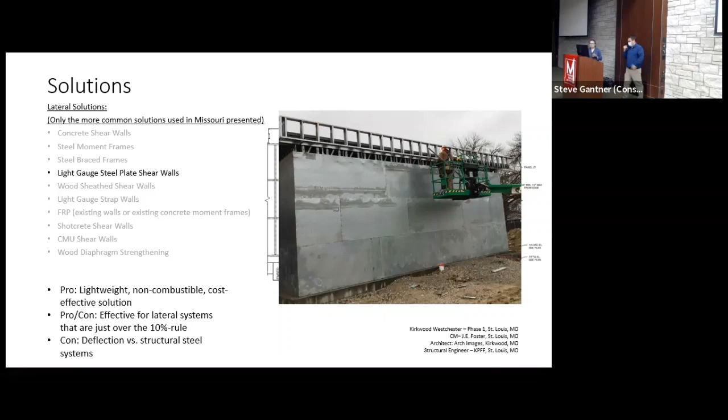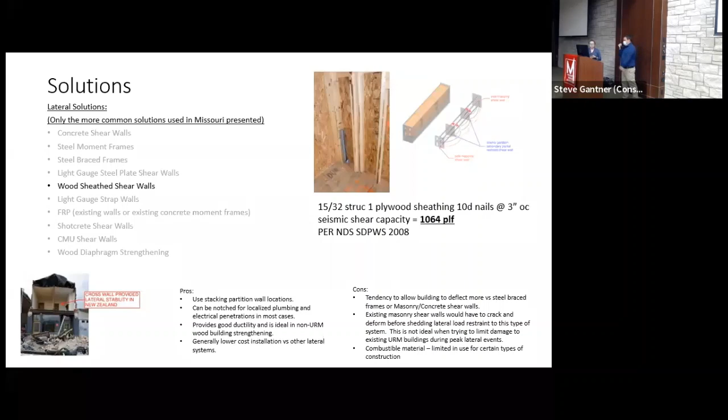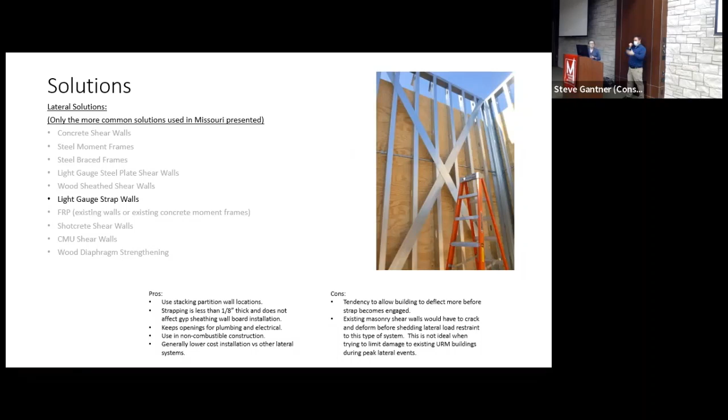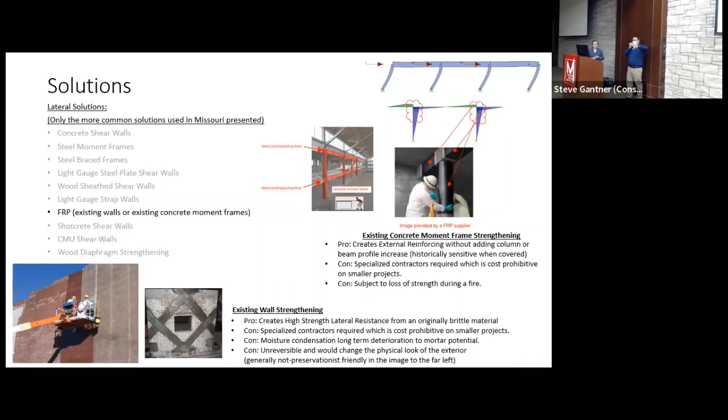FRP, fiber reinforced polymer, mentioned earlier - not as common but still done. Basically, if you're putting it on an existing brick wall, you can sheet it and wrap the joints. But please do not do the exterior application of FRP on your walls. In our local environment, you have to repoint that wall probably every 40 years or so, and it covers the sheathing or face of it already for repointing. It's non-reversible. So there's plenty of examples out there of doing exterior strengthening reinforcement on walls - just don't do that left image.

Another example is what we call shotcrete shear walls. Previously we talked about concrete shear walls - well, this is basically the same thing, but instead of using concrete, you're using shotcrete, which means you won't have all the cost of the formwork required for concrete shear walls. In this particular example, you can see the reinforcement in the middle, and on the left you can see the shotcrete being applied.

As you can probably tell in the image, it doesn't really look very pretty - there's going to be texture to it, there's going to be honeycombing to it. So typically with shotcrete shear walls, you're probably going to want to cover it up anyway, which is okay. You still get the stiffness of a concrete shear wall, it's just not as clean looking.

So if you have, let's say, a 3-story school building you want to strengthen, a good option would be to go ahead and build a CMU shear wall. This allows you to build a block with your mason, and core out some holes in the floor above. In those holes, you run your rebar through and then pump and flow grout out from the top side. So it's an easy application - if you have a 3-story or less building, this is a good economical option if you have to go that way.

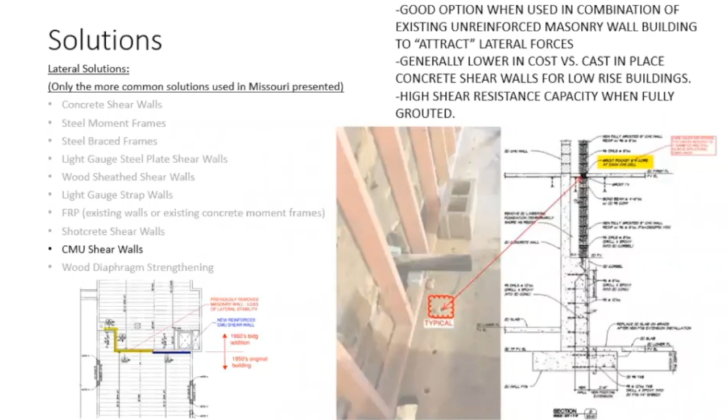Then finally, as mentioned before, if you have a real long thin building with wood construction, consider putting a plywood overlay on the roof system. At least that's really going to stiffen it up and help tie it back to those far away walls.

Finally, if you have an existing storefront building that's really wide but not deep, a simple way to try to strengthen it - because what's going to happen is those old storefronts will really cause the building to start to bubble right at the front, right at the jambs. So a real simple way of improving that is to make the floor more rigid, and you can do that by doing a thin concrete overlay with reinforcement, or a plywood sheeting overlay.

So in the lower left corner, that was a finite element model showing that mid-rocking failure. The image on the right side is where we stiffened up that floor system, so the horizontal loading gets distributed by the diaphragm, basically to all three long walls, and all of a sudden we've got quite a bit more stability. The International Building Code actually gives specific recommendations demonstrating this - so it is codified.

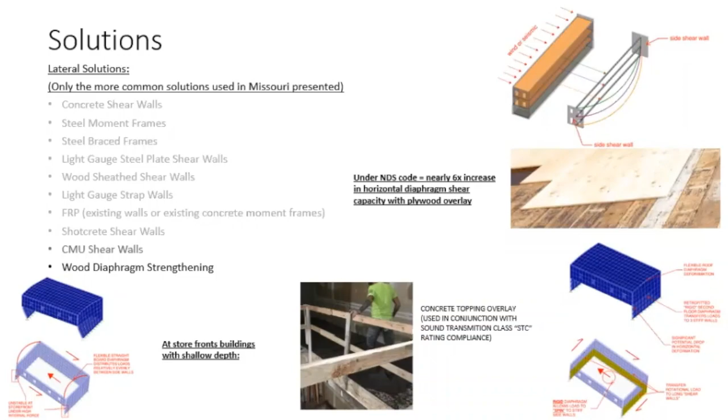Anyone? We check online, nothing online. So George mentioned at the beginning of the program, he did a little history thing. What we're trying to do this year with our programs is a little bit of spec information for you as well, so you can tie this information back in when you get back to your practices.

So what I want to talk about a little bit is cross-referencing specifications. One of the country's leading spec writers, Bob Johnson, had a few quotes here. Coordination of work is not our responsibility, but it's the duty of the contractor. The contractor has to make sure all the parts fit together.

We want to limit cross-referencing to the specific information that the person reading the spec might reasonably expect to find in this section, but it's actually somewhere else. Basically, we want to say it once and say it in the right place. That's the CSI principle. And cross-reference to coordinated assemblies or systems whose components span multiple sections.

We're going to get into a couple of examples here. So coordinating a roof deck, a wood roof deck that's going to be occupied. We've got our structural engineer, KPFF, on duty here. We have our architect and probably a roof consultant going to be involved here.

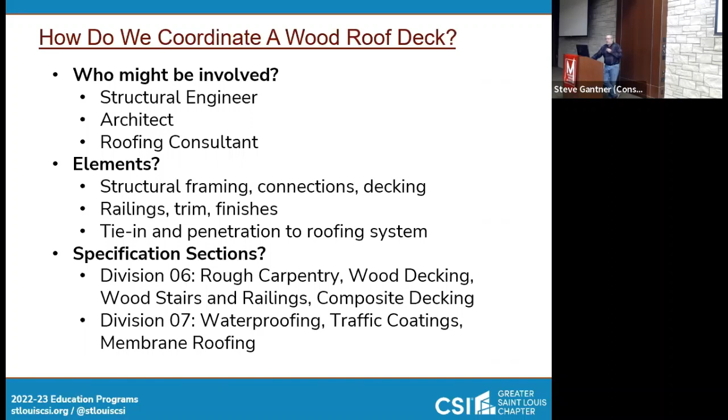Green roof, similar. We're going to consult the same people, but we'll add in maybe a roof consultant, mechanical engineer. If we have a green roof, we're going to water the plants, and we want to make sure excess water gets off the roof properly. Architect for sure, maybe a landscape architect, depending on what it is.

What elements do we need to coordinate? The green roof system — is it extensive or intensive? Is it trays or something else? What kind of plantings are we going to do? Small little sedums, or are we going to have trees? We have bulk soil up there — do we have to do anything with the soil?

These guys need to know what they're dealing with weight-wise, as far as how deep it is. And then, are you going to irrigate it, or is it going to be dependent upon rainwater? And then what additional supporting structures will you need?

Specific sections we're going to need: 3, concrete probably, a little bit of steel, some wood, 5 and 6, and then 7 — waterproofing, membrane roofing, vegetated roof systems, maybe leak detection. If you've got an extensive roof up there, you're going to want to know where the leak is so you don't have to dig everything up. And then your planting and landscaping information.

And then my final slide, how do we coordinate awnings and coverings? Similar, adding those canopies onto the roofs — structural engineer, the manufacturer of that component. If it's a freestanding wind sail, you want to talk to that manufacturer to make sure you get their loading and their information for the structural engineer. Talk to the architect, landscape architect.